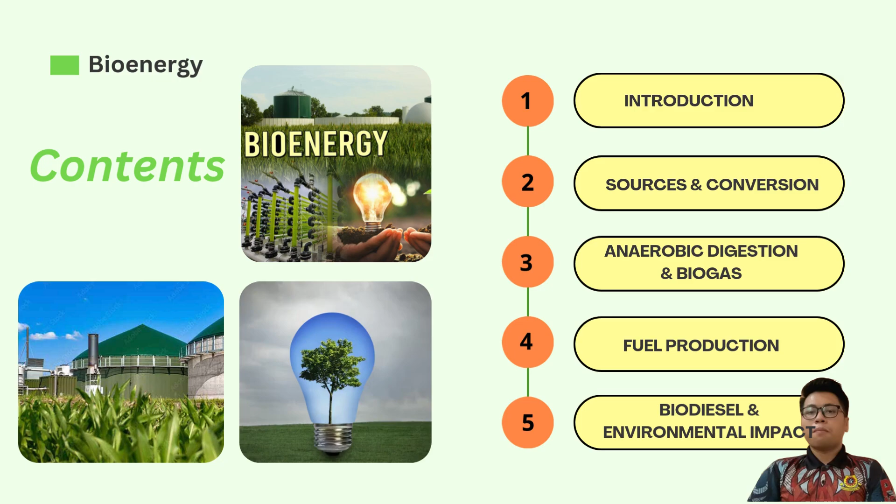Today we will be presenting about bioenergy. This video is divided into 5 sections, which are introduction, sources and conversion, anaerobic digestion and biogas, fuel production, and lastly, biodiesel and environmental impact.

So what is bioenergy? Bioenergy is energy derived from materials which were living matter recently. Bioenergy usually uses biomass as a feedstock to derive energy. Biomass is any organic material made from animals and plants, and it is one of the renewable resources to derive energy. Biomass also has the potential to be used as a solar energy store.

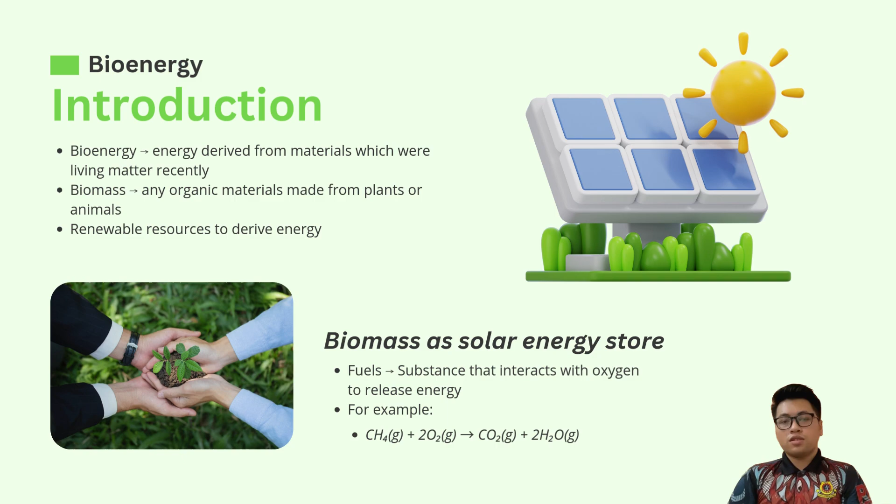Before we go deeper, what does fuel mean? A fuel is a substance that interacts with oxygen to release energy. As for biofuels, they usually derive from biomass. As we can see from the equation, usually one carbon holds two hydrogen and one oxygen, which is more complex than the methane compound.

As for energy generation for bioenergy, it can be shown in the photosynthesis process. Photo means something to do with light, while synthesis is putting together. So how does it work? Plants take in carbon dioxide and water from their surroundings and use the energy from sunlight to convert these materials into starch, sugars, cellulose or hemicellulose, which make up the vegetable matter in plants.

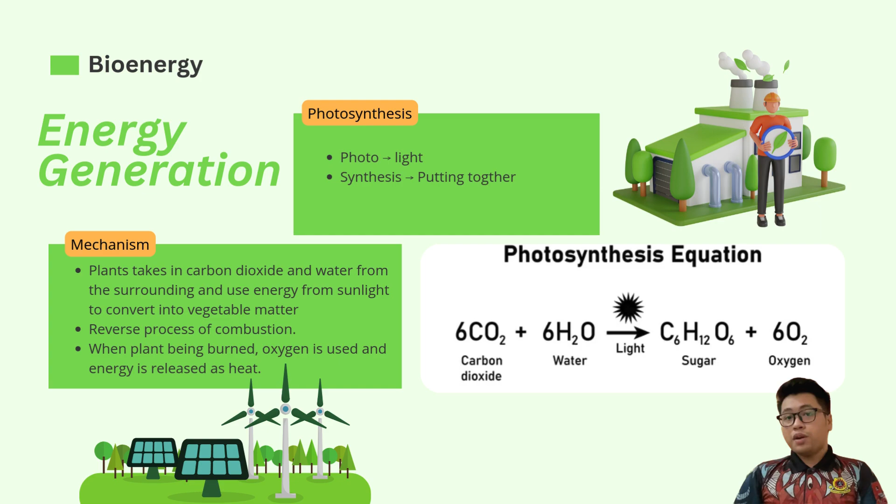As you can see in the photosynthesis equation, this process is exactly the reverse of the combustion discussed earlier. The plant grows by using solar energy to convert carbon dioxide and water into carbohydrate or similar material with a release of oxygen. When we burn it, oxygen is used and energy is released as heat.

My name is HAMIZAH and I will proceed with bioenergy sources and simple conversion. Biomass, the raw material for bioenergy, primarily comes from two main categories. Firstly, we have purpose-grown crops specifically cultivated for energy production, such as sugarcane or maize, which are selected for their high energy yield. Secondly, and equally important, are various waste streams.

These include woody residues from forestry operations like thinning and trimming felled trees, agricultural crop wastes from both temperate and tropical regions, animal wastes, municipal solid waste from our homes and businesses, landfill gas captured from decomposing waste, and other commercial and industrial wastes. These waste materials offer a valuable resource for energy generation while also addressing significant waste management challenges.

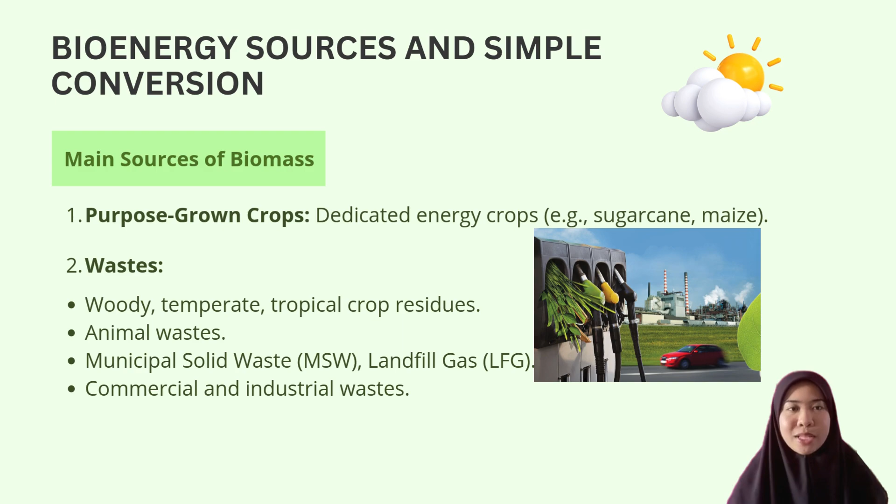Now, let's look at how we extract energy from these biomass sources. We can categorize the conversion methods by their complexity. The simplest approach is the direct combustion of raw biomass. This means burning the material as it is, typically to produce heat for direct use or to generate steam for electricity. A slightly more refined method involves combustion after some simple physical processing.

This can include sorting the biomass to remove impurities, chipping into smaller, more manageable pieces, compressing for easy storage and transport, and drying to reduce moisture content, which significantly improves combustion efficiency and overall energy yield. When we talk about the combustion of solid biomass, several common fuels come to mind. These are readily available and widely utilized.

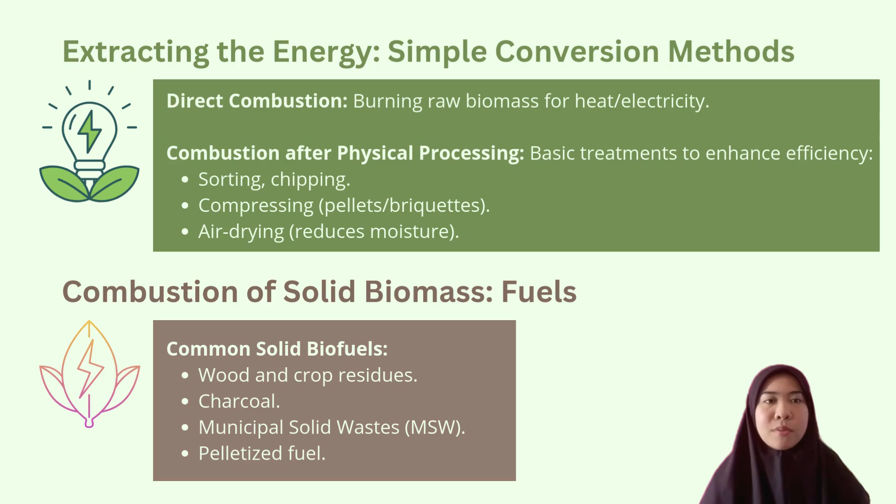They include wood and various crop residues, which are byproducts of agricultural and forestry activities. Charcoal, a carbon-rich fuel derived from wood, is also a common solid biofuel. Furthermore, municipal solid wastes, after appropriate processing, can be combusted to recover energy. Lastly, pelletized fuels typically made from compressed wood waste offer a highly efficient and consistent burning option for modern biomass systems.

Solid biomass combustion offers distinct advantages, particularly in urban environments. It can be financially attractive in large cities primarily due to two critical factors: the increasing shortage of suitable landfill sites, which drives disposal costs, and the high cost associated with transporting large volumes of waste to distant disposal facilities. By converting municipal solid waste into energy locally, cities can mitigate these challenges, reduce their overall waste management expenses, and even generate valuable energy.

However, solid biomass combustion also comes with its drawbacks. Firstly, it can be an inefficient method of energy extraction. This means that compared to more advanced conversion technologies, a notable portion of the energy contained within the biomass is not effectively transformed into usable power. More critically, combustion, particularly without stringent emission controls, produces a wide range of pollutants. These include particulate matter like soot and ash, nitrogen oxides, sulfur dioxide, carbon monoxide, and volatile organic compounds.

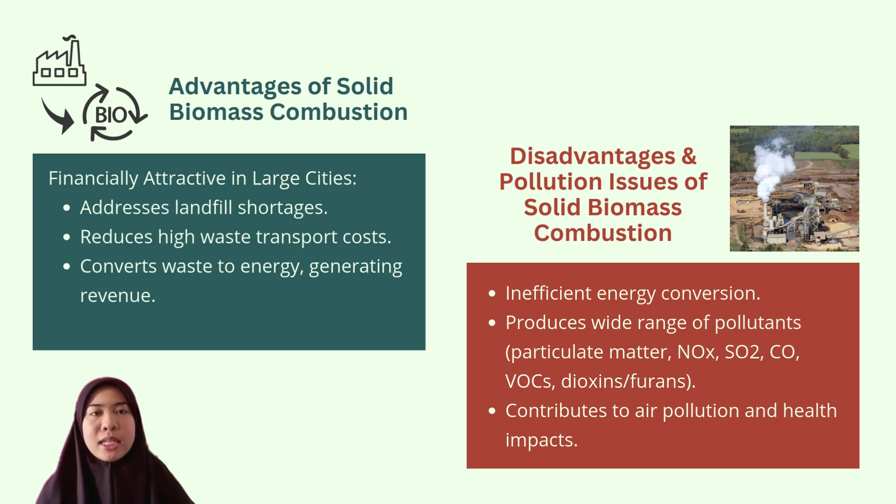When municipal solid waste is combusted, there is also a risk of releasing dioxins and furans. These emissions contribute significantly to air pollution and can have serious adverse effects on both environmental quality and public health. This highlights the crucial need for robust emission control technologies when utilizing this method.

Assalamualaikum, my name is MUMTAZAH and I will proceed with the basics, which is anaerobic digestion. Anaerobic digestion is a biological process that breaks down organic materials like food waste, manure or sewage in the absence of oxygen. This process takes place in a sealed oxygen-free container called a digester. Inside this digester, specific bacteria work to decompose the organic matter.

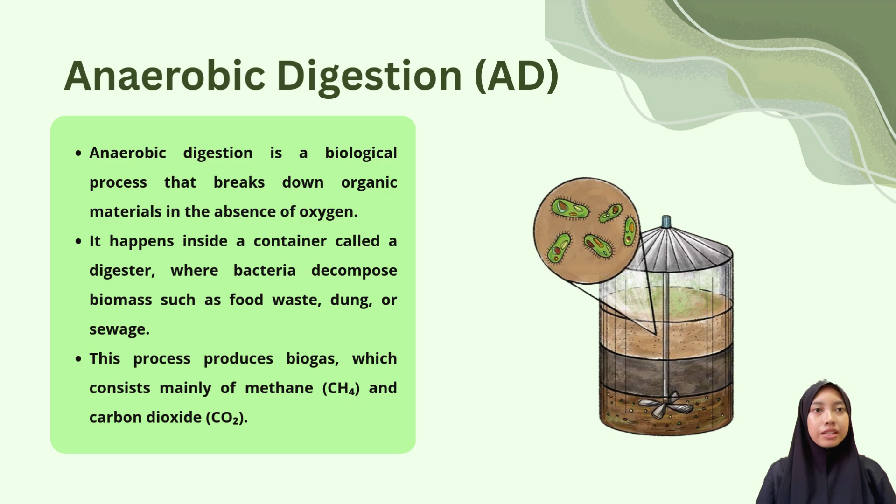As a result, this process produces biogas, which is a mixture of mainly methane and carbon dioxide. Methane is especially important because it's a flammable gas, which means we can use it as a renewable source of energy. So this is how digesters actually work to produce biogas.

The process starts when organic waste is fed into the AD. Inside the digester, the environment is completely oxygen-free and the temperature is carefully controlled to create ideal conditions for microorganisms. These microorganisms go through 4 main stages, which are hydrolysis, acidogenesis, acetogenesis, and methanogenesis.

The biogas rises to the top of the digester and is collected, while the leftover material called digestate can be used as a natural fertilizer. Biogas mainly contains 50 to 75% methane, with the rest being carbon dioxide and a small amount of hydrogen sulfide.

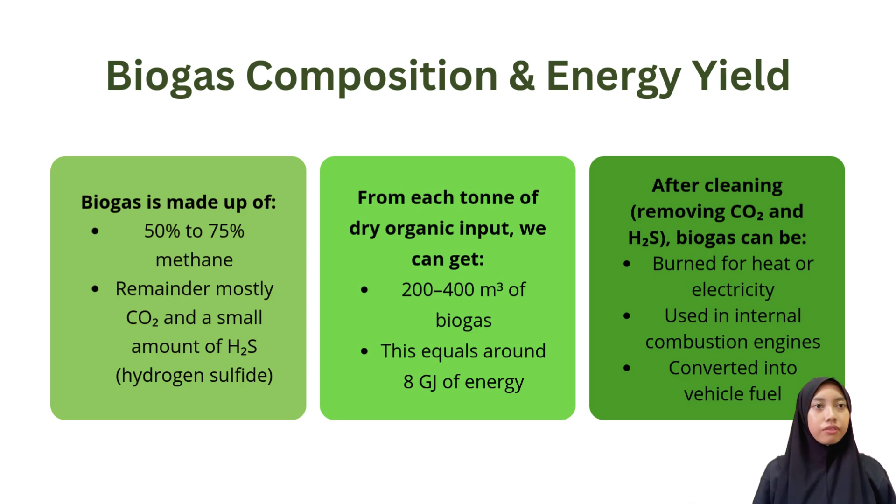From 1 ton of dry organic waste, we can get 200 to 400 cubic meters of biogas, which is about 8 gigajoules of energy. After cleaning, biogas can be burned for heat or electricity, used in engines, or turned into vehicle fuel, and is a clean and renewable way to turn waste into useful energy.

AD for Municipal Solid Waste, or MSW, focuses mainly on the organic portion of waste like food scraps or paper. Before digestion, the waste is mixed with water into a slurry to make it easier to process. Some key advantages are they can be built closer to cities, which helps reduce transport costs, and they use less land compared to landfills. However, there are also disadvantages.

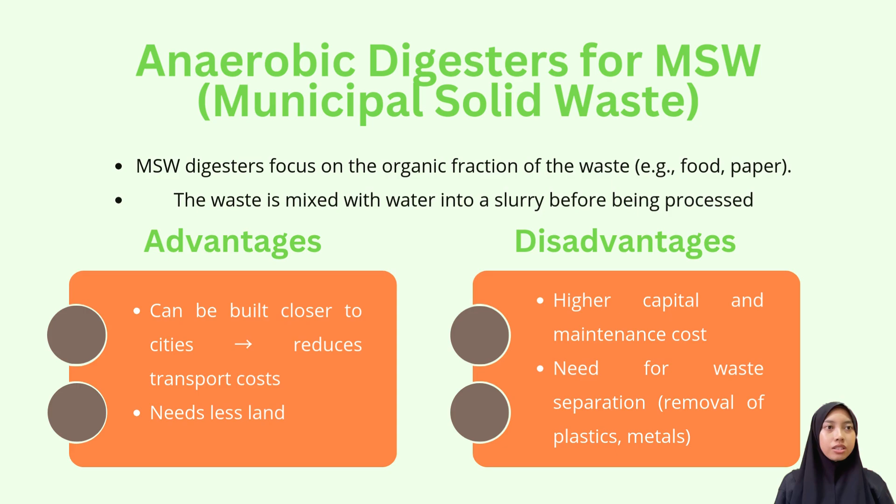They need higher capital and maintenance costs, and the waste must be sorted first to remove plastic and metals that can't be digested.

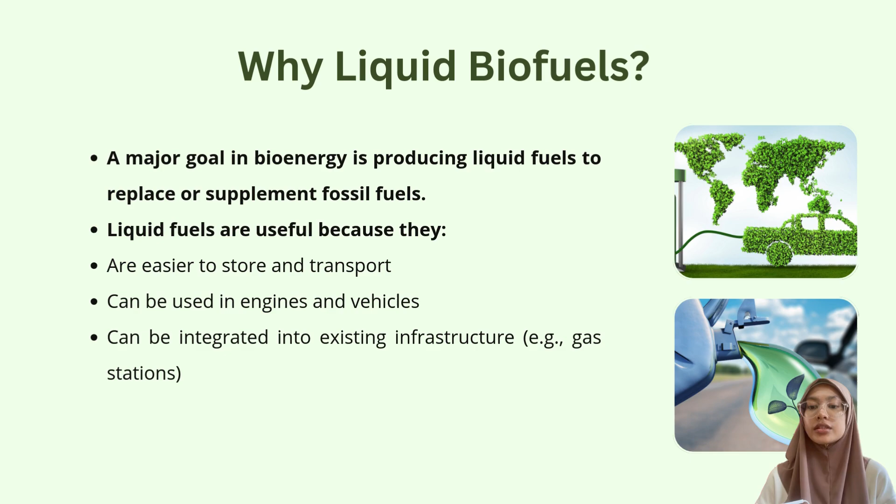The first one is production of biofuel by fermentation. This is a biological process where sugar-containing biomass like sugarcane is converted into ethanol using yeast. The yeast breaks down glucose through anaerobic respiration, producing ethanol and carbon dioxide as byproducts.

Ethanol has multiple uses as a renewable fuel. One common application is in gasohol, which is a mixture of gasoline and ethanol. It can contain up to 26% ethanol. Adding ethanol improves combustion, reduces greenhouse gas emissions, and helps reduce our dependence on fossil fuels.

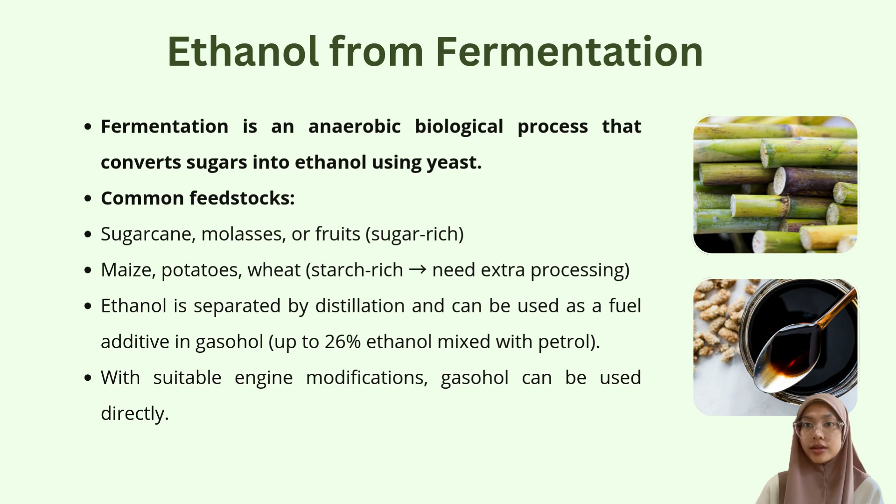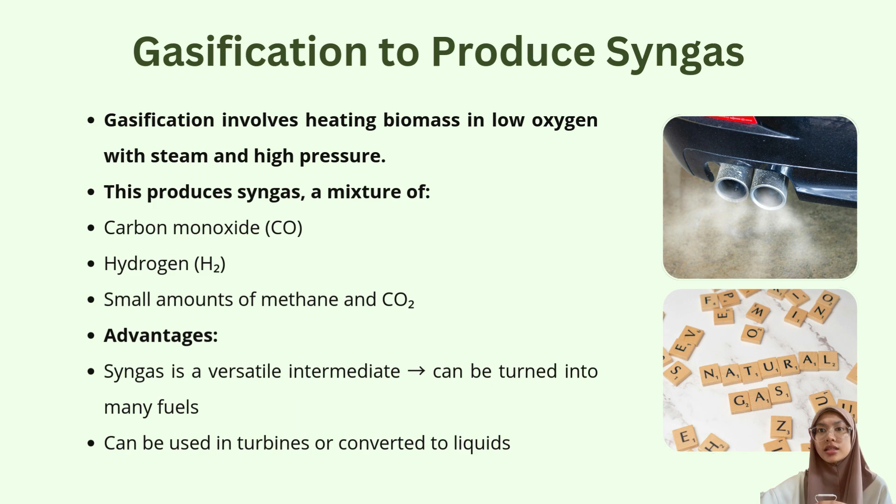Next is gasification to produce syngas. Gasification is the process of heating biomass in low oxygen with steam and high pressure to produce syngas, which mainly consists of carbon monoxide and hydrogen. Syngas is a very useful intermediate fuel. It can be used directly for heating or further processed to produce liquid fuels like methanol or synthetic diesel. It can also be used in turbines or converted to liquid.

This slide shows conditions and reactors for the gasification process. Here are the usual conditions, and I also include different types of gasifiers used based on design and feedstock. Some common types include updraft gasifiers, where air enters from the bottom and biomass is loaded from the top. Next is downdraft gasifiers, where both air and biomass enter from the top. And lastly, we have fluidized bed gasifiers, which offer better temperature control and efficiency.

Now let's briefly look at another important process for liquid fuel production, Fischer-Tropsch synthesis, or FTS. This is a chemical process that converts syngas, which we produced through gasification earlier, into liquid hydrocarbons like synthetic diesel, jet fuel, and waxes. The reaction combines carbon monoxide and hydrogen in the presence of metal catalysts, usually iron or cobalt, under high pressure and temperature. So, by combining biomass gasification with Fischer-Tropsch synthesis, we can produce sustainable, cleaner burning fuels from renewable feedstock.

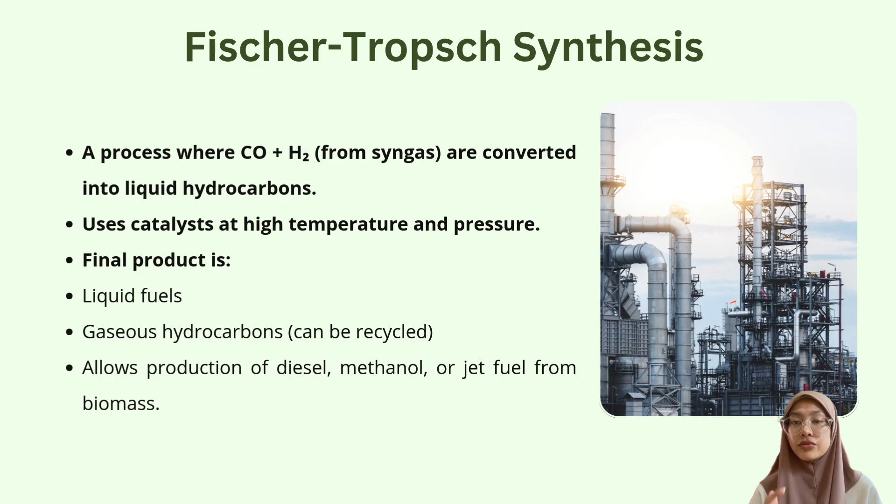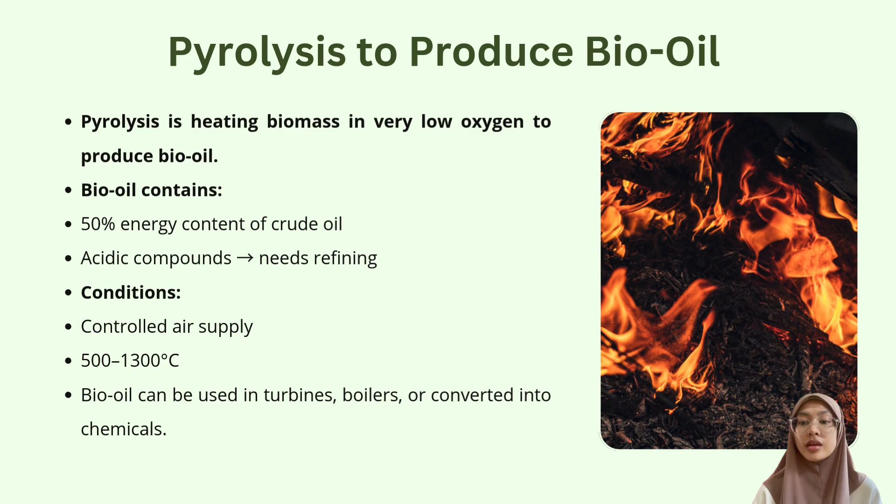Moving on to another method, which is pyrolysis, where biomass is heated in the absence of or with very low oxygen. This process prevents combustion, and instead it breaks the material into three products: bio-oil, biochar, and syngas. But here the main focus is bio-oil. For effective pyrolysis, temperature typically ranges from 500 degrees C to 1300 degrees C. Also, the oxygen supply must be tightly controlled to avoid combustion.

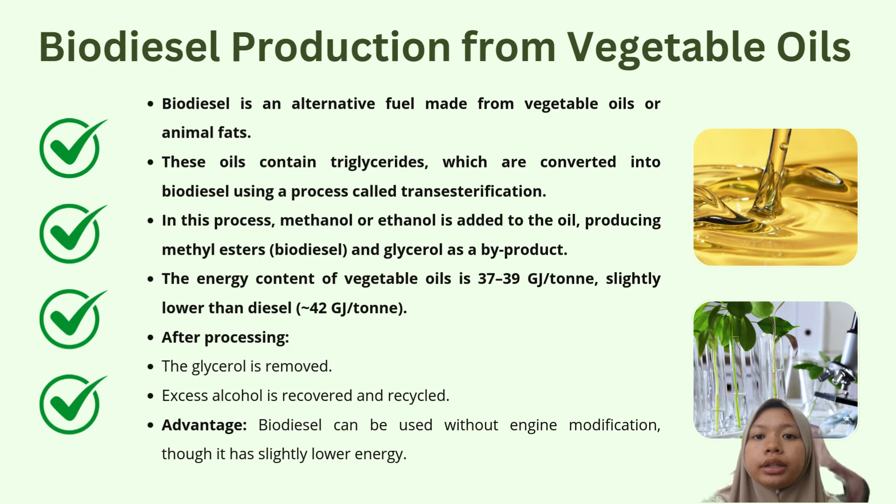Biodiesel is a fuel made from vegetable oil or animal fats. We use a process called transesterification, where we mix the oil with methanol or ethanol. This creates biodiesel and glycerol as a byproduct. Although it has slightly less energy than diesel, it can be used in normal engines without any changes.

Next, using biodiesel helps to reduce carbon dioxide emissions, since plants absorb the CO2 as they grow, and when burned, it is released again, keeping the carbon cycle balanced. Methane is another concern because it is much stronger than CO2, but if we burn it completely, it becomes less harmful compared to CO2. So this helps to reduce overall greenhouse gases.

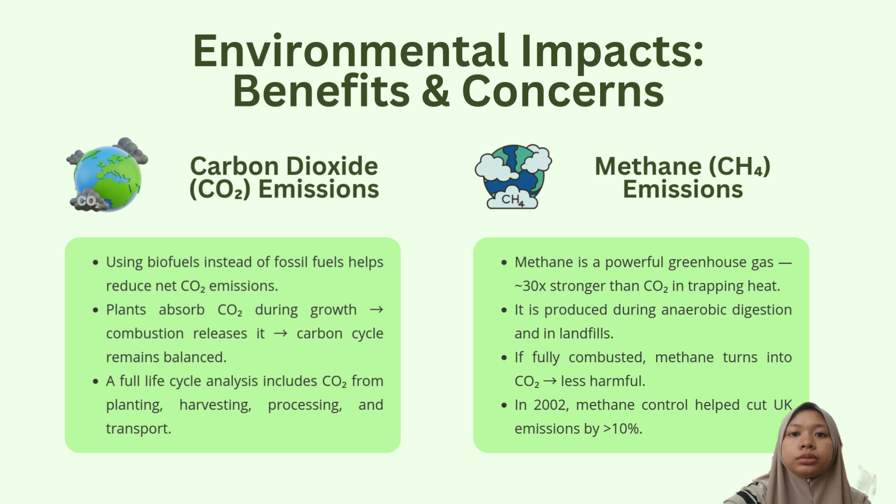Next, producing bioenergy needs a lot of land, which can affect food crops, biodiversity, and also increase water use. It can also be costly from planting to processing the crops. Using waste as a fuel source might help to cut costs, but it still needs investment and planning.

Next, we go to RDF and SRF, which are fuels made from waste materials like plastic or paper that cannot be recycled. They help to reduce landfill waste and produce energy, but sorting and preparing the waste costs money, and burning it still releases some pollution. So while useful, they come with a few downsides.

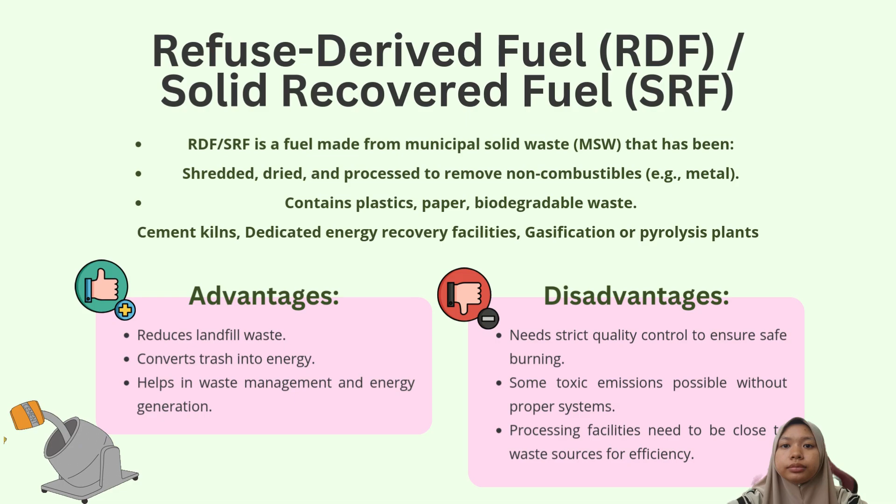So as a conclusion, biodiesel and RDF are practical examples of how we can turn waste or crops into energy. While bioenergy has clear environmental benefits like lower CO2 and waste reduction, it also poses challenges in land use, cost, and pollution control. Moving forward, combining efficient technologies with careful planning is key to making bioenergy truly sustainable.